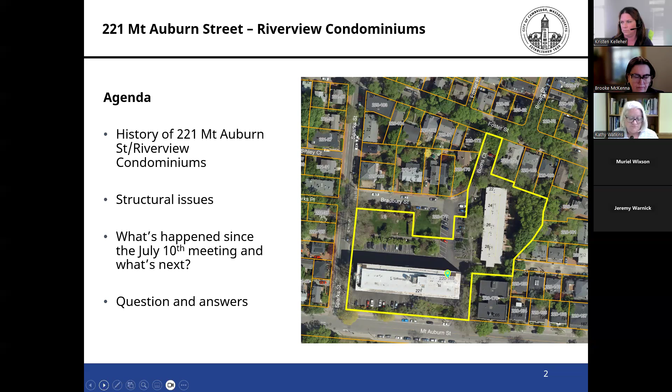And again, I emphasize that some folks have heard this presentation 2 or 3 times, but again, I ask for your patience. And also with us tonight, and presenting with me, is Brooke McKenna, who's our Commissioner of Transportation. And then I would also say we have a lot of staff that have really been engaged with this up to the highest levels, including the city manager and a number of department heads across the city, really helping us work through this situation. So you can go ahead to the next slide. And again, as Kristen mentioned, we're going to do Q&A at the end and just make sure we can have time to get through as many questions as folks can.

This is an executive summary. It's got a lot of words in it. I just want to say that we wanted to pull together a high-level summary that people can read through. This whole presentation will be shared on the website after tonight's meeting.

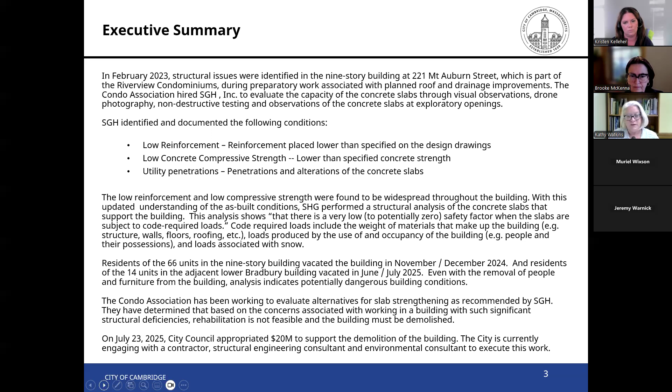So I want to take a little bit of a step back and even just talk about the history of the development that's known as Riverview Condominiums. And so the Cambridge Redevelopment Authority, going back to 1958, acquired all of these parcels and created one big parcel for development. And then that was developed by First Realty Company of Boston.

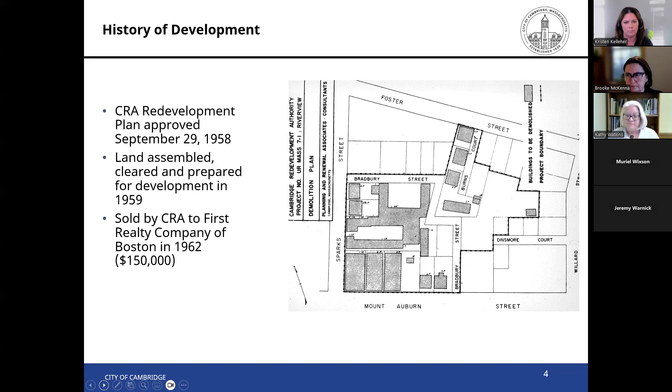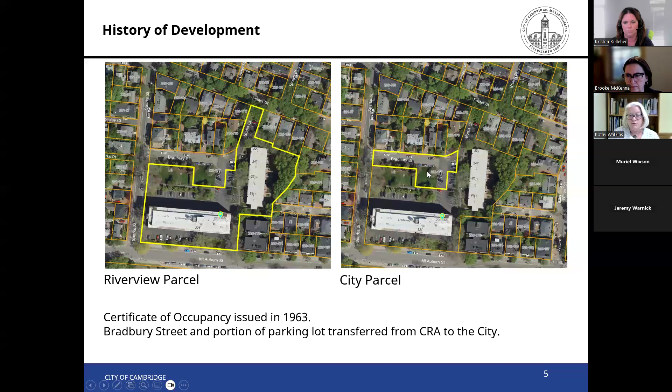Good, next slide. So after the CRA consolidated all of those parcels, they then created the parcel on the left, which is known as the Riverview parcel. And that includes both that front building, the 9-story building that we're really focused on tonight, as well as the lower Bradbury units that folks talk about. On the right is the parcel that became the city's parcel, and that includes Bradbury Street itself, as well as a little bit of open space there. So there are these 2 parcels that people see and think of.

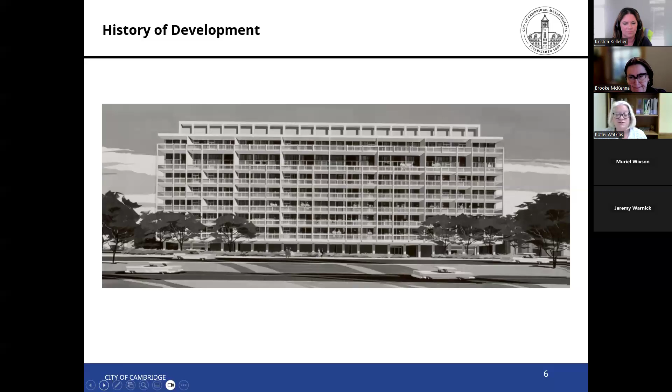This is an image, we sort of call it the Jetsons image. It shows the architect's view of what the building would be before it was developed, and I think it's a pretty accurate reflection of the image.

Next slide. So again, these are the 2 different buildings. So the first one with the yellow star is the 221 Mount Auburn Street. It's the 9-story concrete structure with about 66 units. It is again the focus of tonight's conversation. The blue star indicates the lower rise 3-story Bradbury building that has approximately 14 units. The two buildings share utilities, and they're also part of one condominium association, but the structural issues and concerns are isolated to the 9-story 221 Mount Auburn Street building.

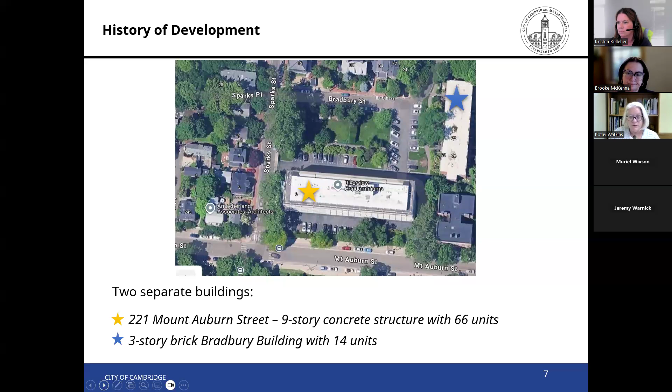The next two slides talk a little bit about what the existing zoning is, and we got a lot of questions during the previous meeting about what can happen on the site once the building is demolished. And while we are a long way from having a development proposal, we did want to share the existing information. So the entire site is zoned residential, and there's two different pieces of that. So again, the piece in the front where the larger building is, is zoned Residence C2. And that zoning allows multifamily housing up to 7 stories, about 85 feet tall. The back part of the parcel is zoned Residence C1, and that allows multifamily housing up to 6 stories above grade if the housing meets inclusionary zoning requirements.

And I think that people hopefully have a pretty good understanding. Inclusionary housing means that some of the units are reserved for low to moderate income households. Any housing developments in the city that are 10,000 square feet or greater are required to include inclusionary zoning housing. And then any development that is greater than 75,000 square feet requires a special permit approved by the planning board that includes full public hearings. And so we just want to say that we don't know exactly what's going to happen or what that will look like, but there would be a public process. I do also want to point out the entire site is approximately 2 acres and has currently a little over 100,000 square feet of residential housing.

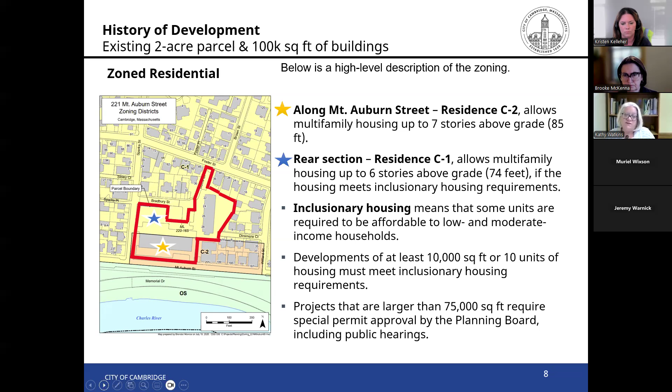Next slide. So again, we talked a little bit about it's fully residential. We talked about the zoning. Just want to be really clear that there are a lot of nuances associated with development that would be worked through in that development process through the planning board. There is no identified timeline for the redevelopment of the site. Really, as you'll hear as we're going through this, the current focus, and certainly the city's primary focus at this time, is really on protecting public health and public safety. And so that is the primary focus of what we're going to talk about tonight, and also the primary efforts over the next 6 months.

Once the city completes the demolition, the property remains under the ownership of the condominium association. So the individual unit owners would still continue to own that property. They have indicated that they think it will take at least a year to go through the legal process before they are in a position to sell or redevelop the property. So just again, want to lay out that there's a lot of questions about redevelopment, and we're providing as much information as we can, but there's a lot that we don't know yet. And one of the things I do also want to point out is that I think that's true of many different areas. We are really trying to be as transparent and share information as much as we can and as quickly as we can. But that also means that there are a lot of different questions that people have that unfortunately we don't have the answers to at this time.

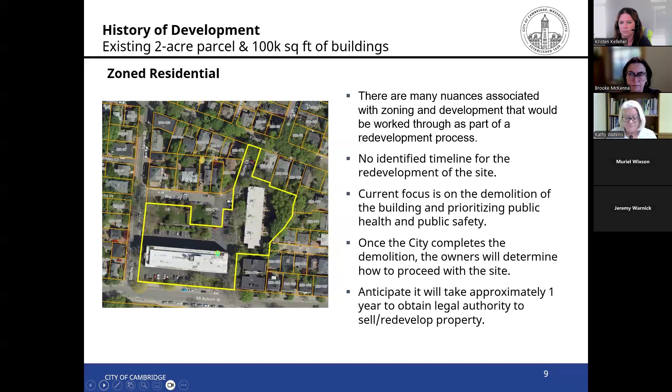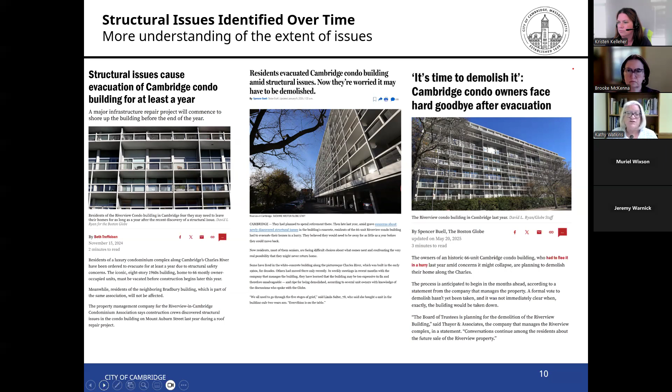So we're really going to focus now on the structural issues in the building. I think it's become clear to us as we've been meeting very frequently with the direct abutters, and at the meeting we had 2 weeks ago, that there's a pretty good understanding in the community about the fact that this building has issues that need to be addressed. And so these are just some highlighted coverage that provide a high level overview of that. I think the next slide shows that even more recently, as the city has become involved, there's been a lot more coverage. Jeremy Warnick, who's helping us here with the logistics tonight, is really our media person, and he said that there's been over 150 news stories about this building, and so there's been an extensive amount of coverage.

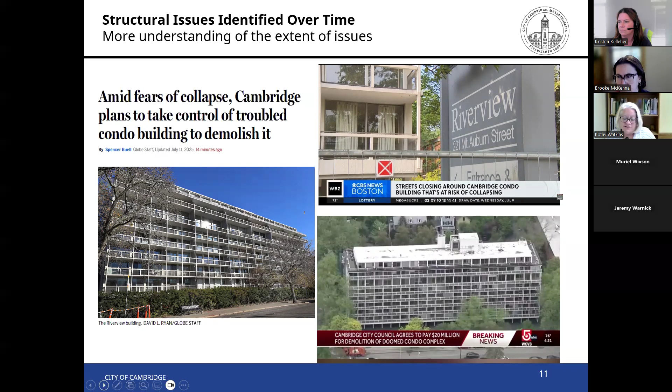And then, as we talked about in the articles, first identified that there's repair issues. Let's figure out how to repair them, determined that that wasn't possible, really focused on how do we demolish the building, and then really came to the city this late May, early June of this year saying they need help. They know the building needs to be demolished. They don't have the resources and the ability to do that demolition themselves. And so really reached out to the city. And that's when we really became involved.

And I would say we've been meeting 2 or 3 times a week with varying groups about this project to really understand what's going on and what's really necessary, what steps are necessary to be protective of public health and safety.

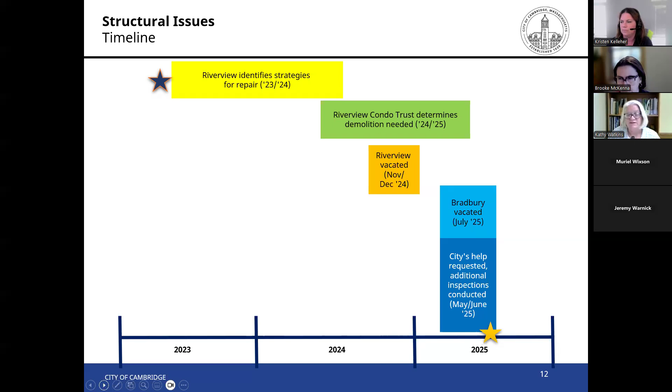So again, we talked a little bit about 2023. The Condo Association was doing preparatory work to look at roof repair as well as drainage improvements. And so when they were doing that work, they were coring through balconies to do new drainage stacks. When they did that, they encountered rebar. So we talk about structural steel in the concrete, and the rebar was not located where they expected it to be, which raised some red flags of what's going on here.

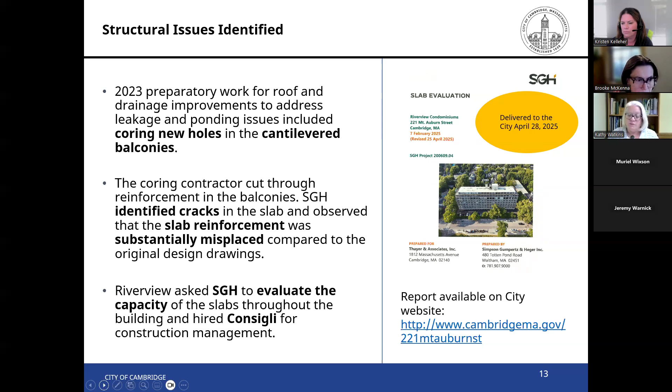And so at that point, they had SGH, who is one of the premier structural engineering firms that really specializes in concrete, come in and do a full analysis to say what's going on in the building and what do we need to do to repair the building. So SGH really went through the entire building, and they did ground penetrating radar to identify the location of where that steel was and compared it to where it should be.

So if you think about, you have a concrete slab that's 8 or 9 inches thick, and that's really providing some of that structural support for the building. The way that concrete slab really gets its full strength is that there's rebar that's also placed within that concrete. That rebar is specified to be at a very specific location. When they did the analysis, they found throughout the building, it was placed about 2 inches deeper than it should have been. So that means it's not providing the structural strength that it was designed to provide.

The other issue they found, and again, pretty consistently throughout the building, is what is the strength of the concrete? So we generally talk about concrete in pounds per square inch. And so the building specified concrete to be 3,000 pounds per square inch. When they tested it throughout the building, it was on average about 2,000 pounds per square inch. So again, consistently less strength than was specified, and again, consistently throughout the building.

There were some other issues, and again, I would say those are much less severe. So there were utility penetrations that have been made over the years and other types of concrete repair. But the most significant issues are really these first two that were construction issues and consistent throughout the building.

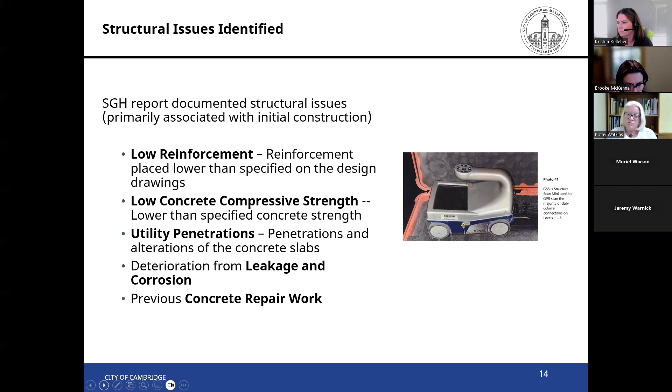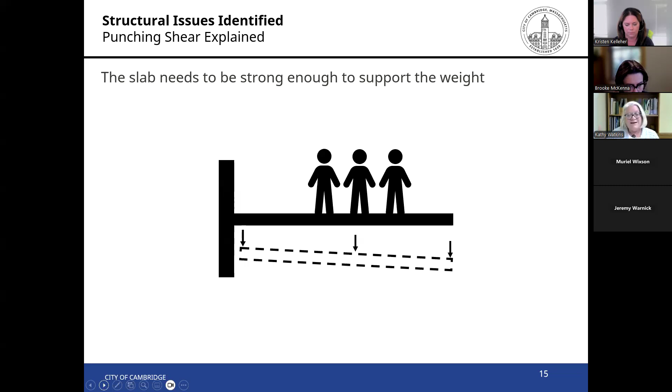And so we want to talk a little bit about what does that mean and what are the concerns that that means for the building. So when we think about the building, and again, that concrete slab, it needs to be designed to support all of the weight of the building. And so the weight that you're looking at when you're designing the building is the weight of the building itself, the weight of the people and their possessions, and then also things like snow load. So if we get a big snowstorm and there's a lot of snow on the roof, that can add a significant amount of weight to the building.

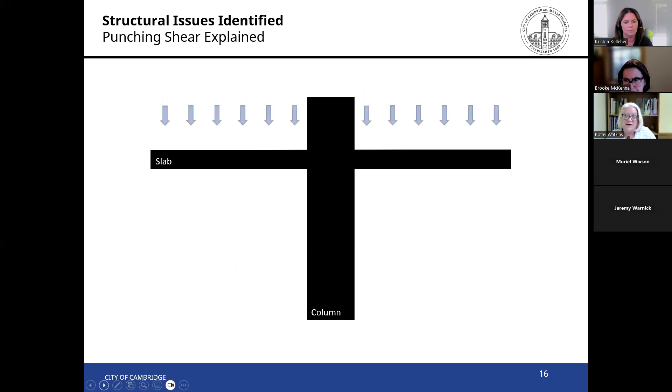So you can go to the next slide. And so again, this is sort of a diagram that shows there are these columns to the building and then these slabs. So we talked a little bit about the slabs that have that concrete strength issue and also that rebar issue. And then there's this connection between the concrete column and the slab. And so that needs to be strong enough to really support all of those different weights that we talked about.

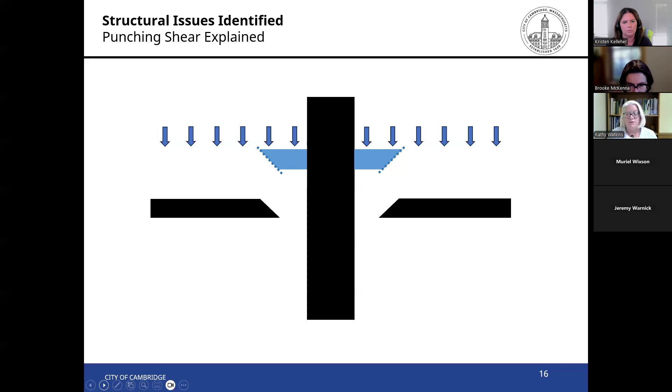And the concern is that if it's not strong enough, you can get what's called a punching shear. And a punching shear failure is a very quick and sort of brittle failure. And so again, if you sort of do the next animation, if you don't have the strength there between the column and the slab, you can get this very dramatic pancake kind of collapse. And so you can lose those columns, and then that can impact the levels below. And so that is the concern that we're really worried about with the building.

And so as SGH really went through and looked at the building, did that analysis, there are almost 800 of those column to slab connections, and they've done an analysis of each of those. Their report showed that there's very low to potentially zero safety factor, again, when the slabs are subject to all those code required loads, like the people, their possessions, and the snow.

And then they also looked at, okay, well, right now it's not winter and the building's been vacated. And so there's less weight on the building. And even with that less weight, there's still a significant number of potentially dangerous slab to column connections.

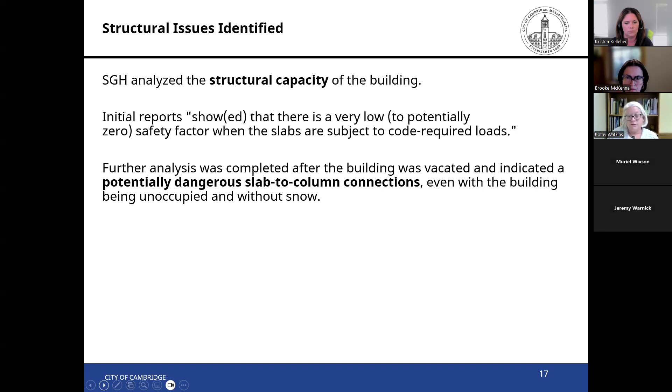So again, this is when the condo association really reached out to the city again, sort of in May, and then we started really meeting in June and really shared the analysis showing the low to zero factor of safety, and again, particularly with that additional snow load, and really identified that the building is over capacity and potentially dangerous. So we've been working with the condo association trying to figure out how does the building get demolished.

When the condo association came to the city, the city manager reached out to the governor's office to make sure that we're getting support and information and really collaborating with various state partners throughout this process.

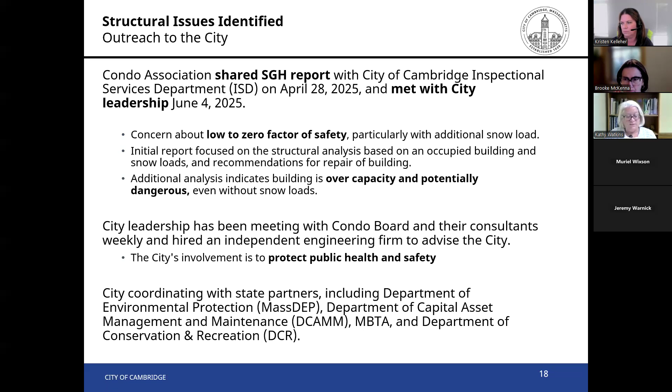And one of the things I don't know that I touched on quite enough, but the condo association has also gone through a process where they identified that there were these issues with the building and then said, well, obviously your first assumption and your first move is to repair the building. And so they really went through a process to say, what would it take to repair the building? And with that came up with, it's about an $80 million repair project.

And once they really got into the details of it, it became clear that given the structural concerns in the building, it's really not possible to do that level of work in that building. And so it came to the very unfortunate conclusion that the building needed to be demolished. And so now we're sort of in this moment where it's become clear that the city really needs to get involved, and needs to really take the lead on this demolition.

And so one of the things we're really focused on is how are we reducing risk? And we're talking about risk sort of in two different buckets, so that we have risk between now and the time demolition begins. And then we also have risk during demolition. And so we're going to talk about those two things a little bit differently. So the first is between now and when demolition can begin, what can we do to reduce risk?

And so people will have seen that the contractor working for the condo association put up additional fencing to really secure the site, to make sure people aren't entering the site that shouldn't be there. They've also been working to disconnect utilities. And the emphasis of that is really, one, we need to disconnect the utilities to begin the demolition. It also helps reduce risk.

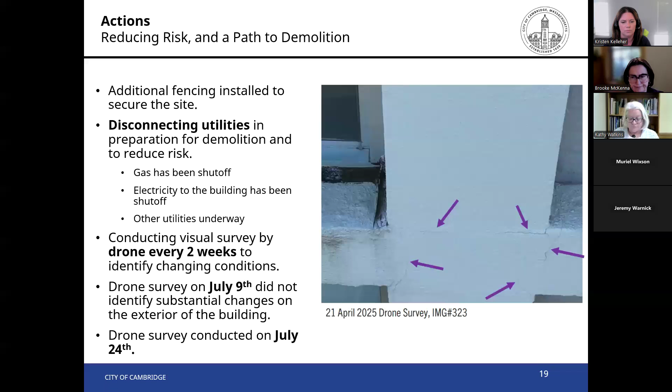The other thing we've been doing, and I would say particularly in the last sort of 3 weeks, has been doing a lot of outreach, making sure that we're sharing the information that we have with the broader community. We had the meeting on July 10th. We had over 80 people in attendance. That was in person. And then we wanted to have a follow-up meeting tonight, again, to make it more accessible so that people that weren't able to attend could come, or people that were not able to attend in person

have the Zoom option. We've also been meeting really closely with the direct abutters who are most impacted by both the current situation as well as during the demolition process. So we've reached out and met with, I think, just about every resident on that first section of Sparks Street, the Bradbury Street residents, and then also the condo building immediately to the Harvard Square side of the Riverview.

The other thing we're doing is really working to get an experienced contractor on board. And so we know that this type of work is extremely complicated in this dense, very close, tight knit residential neighborhood. And so we want to make sure that we have a good contractor that is prepared to do that work. We've also closed access to the adjacent public streets, and that happened on July 19th.

And I think we've had a lot of questions about why are we closing the streets now, but demolition isn't going to begin for another couple months. And based on the information we have, again, we were trying to keep people away from the building. We know that people using the public streets don't necessarily understand what's going on, and it's really important for us to keep people away from the building. So we did make the very difficult decision to close both Mount Auburn Street and Sparks Streets, as well as DCR closed the one closest lane of Memorial Drive.

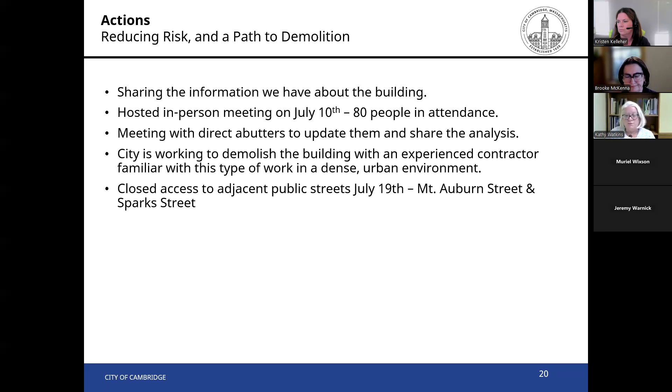So I'm going to turn it over to Brooke, and she can really talk through the work that's been done to get those detours in place. And as I do that, I just want to give an incredible shout out to Brooke and her whole team in terms of all the work that's really gone into this. And while it's been extremely challenging and I know frustrating and difficult for people, it has gone extremely smoothly given the substantial detours that are in place. So I will turn it over to Brooke.

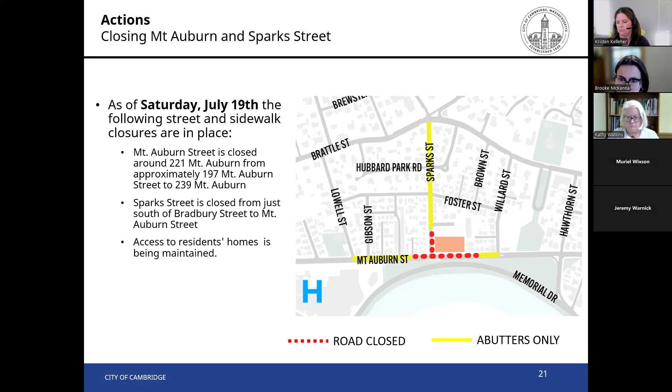So we have done as much as possible in terms of communication to get the word out about these closures and these detours. So we did reach out to the residential abutters. We worked closely with the hospital and other key city partners. We were lucky enough to get a good amount of media coverage from local, regional, and national outlets to really get the word out to an even wider audience.

We utilized the city's Code Red alert system, as well as email and app emergency alerts from Nextdoor and the Cambridge Police Tip 411 notification system. We had stories on the city's website. We did email mailings and a social media campaign. So you can see photos of some of the samples of the alerts that did go out.

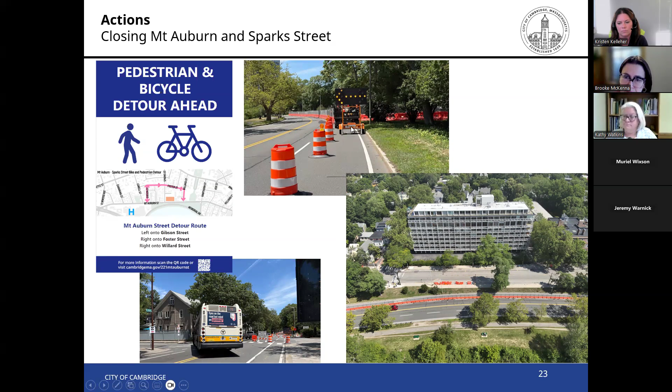And in the lower left, you can see with the detours in place, the MBTA bus navigating that detour route. We've added additional signage to make sure that the pedestrian bicycle detour is really clear for folks. That's one of the more challenging aspects of it. With most construction sites you come across, the street might be closed to vehicles, but you can always get through on foot or by bike. But in this case, because it is a safety issue, we do have to detour the pedestrians and bicycles as well. Now we can go to the next slide.

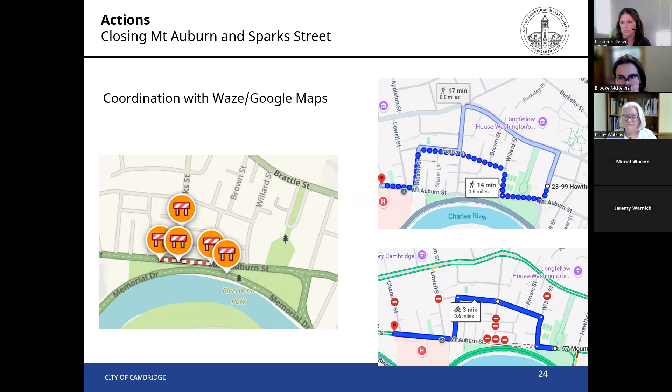Whereas a couple of weeks ago, if you were traveling from point A to point B, the navigation apps might send you straight down Mount Auburn Street. Now they know that's not possible. And that results in people generally being kept further away from the detour area. That's a really important part of our strategy. We want people who are coming to the local area to come and use the detours, but folks who don't have a local destination, it's better to stay away from the general area. And next slide.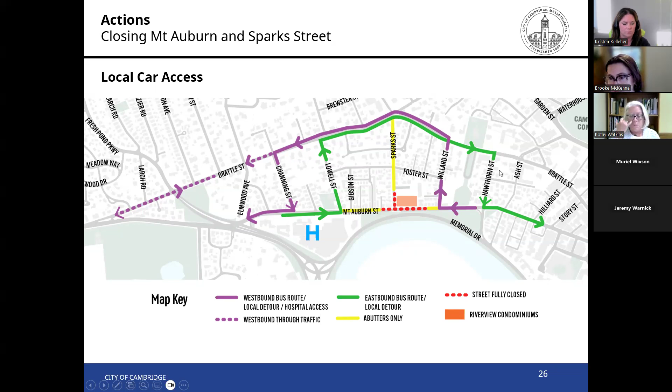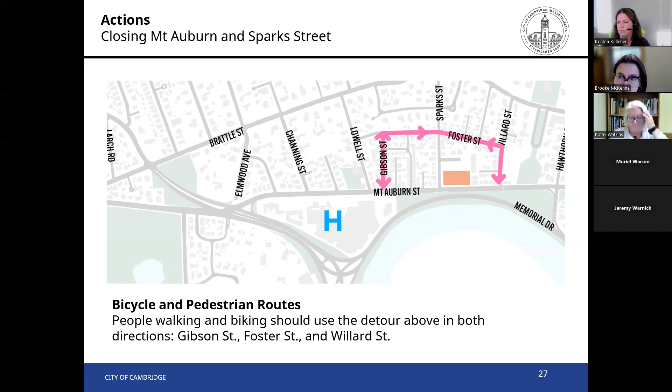In the Harvard Square direction, you would follow the green line, which would take you up Lowell Street to Brattle Street, and then back down Hawthorne Street. And then you can continue along Mount Auburn into Harvard Square. We can go to the next slide. This is the bicycle and pedestrian detour. It is the shortest detour, and folks can go up Gibson Street to Foster Street and then down Willard. That is the same in both directions, whether you're coming from Harvard Square or coming from Watertown.

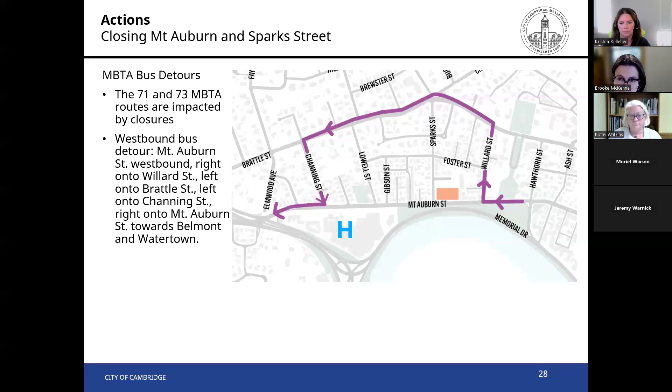As I mentioned, there are two significant bus routes, and they are following the same detour route as the local traffic. Coming out of Harvard Square, they'll go up Willard, down Brattle Street to Channing Street, and then along Mount Auburn. And in the opposite direction, we can go to the next slide, reverse that and go up Lowell Street to Brattle Street, down Hawthorne, and back to Mount Auburn and into Harvard Square.

In order to make these detours work as seamlessly as we can, we did make three streets into temporary one-way streets. Channing Street is now operating one way towards Mount Auburn Street. Lowell Street is operating one way away from Mount Auburn Street towards Brattle. And Willard is also operating one way northbound towards Brattle Street. What you don't see on the map is Hawthorne Street, which was already a one way that operates southbound towards Mount Auburn Street. So we now have two one-way pairs for either end of the detour.

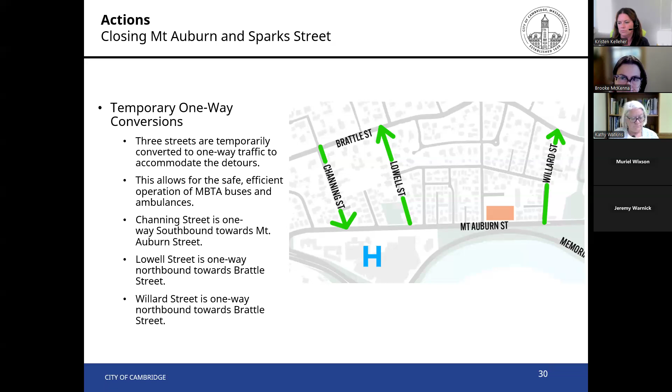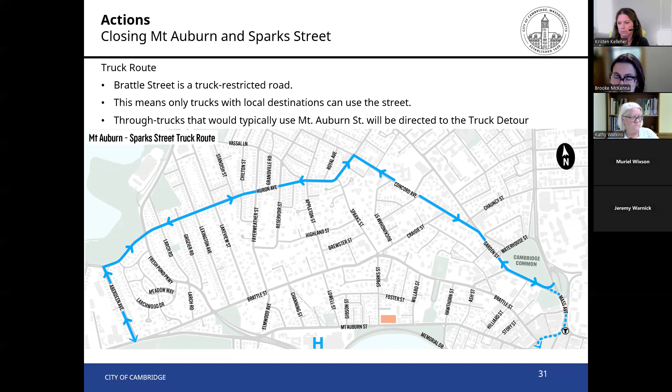Again, as I mentioned, Brattle Street is a truck restricted route. So we do have an alternative truck detour for through trucks that starts all the way out at Aberdeen Ave, travels up towards Huron Ave to Concord Ave to Garden Street and back to Mass Ave. And that detour is the same whether you're heading towards Harvard Square or away from Harvard Square. So the only trucks that will use Brattle Street in the local detours are those with local destinations.

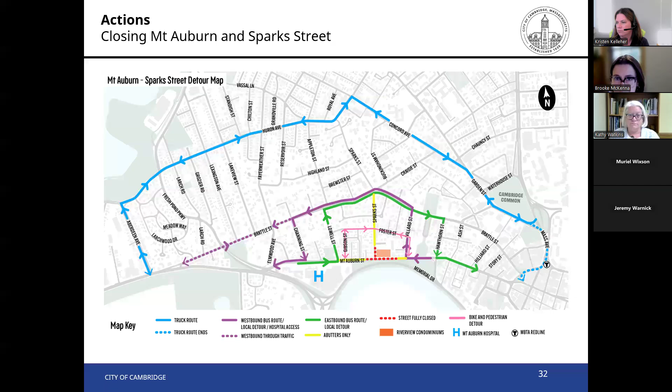All right. So this one, we've had the closures in for almost a week now, and we are happy with the way that it's been going so far. We have been hearing from folks with concerns and questions and comments, and we really appreciate that people have been reaching out to us. We have made some adjustments. We were able to add some time to Hawthorne Street at the Hawthorne and Mount Auburn signal. We're continuing to add signage where needed, and we'll continue to monitor and make more adjustments as we go along.

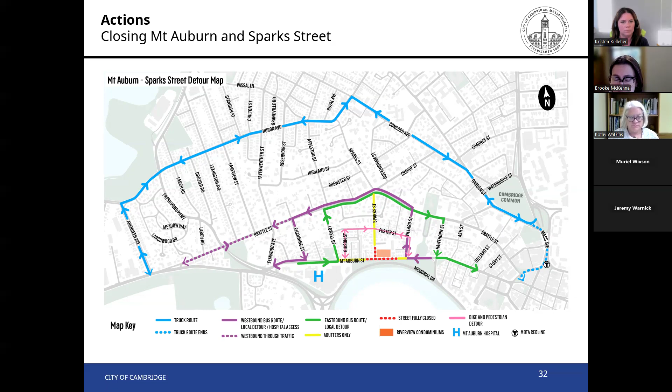We made a few parking changes, a few parking restrictions to make sure that the buses and larger vehicles could make turns. And then we also converted some 2-hour parking along Mount Auburn Street to resident parking only to make up for some of what was lost with the closure. And as I said, we are continuing to monitor that, and we'll continue to make tweaks as we go along.

Folks who live locally might recall that there has been some construction work happening prior to the closure along Mount Auburn Street near the hospital, and that is MBTA work on duct banks in the sidewalk. So that's Newport Construction working on behalf of the T. And we did stop that work this week while we got the detours in place and gave them a little time to settle in. But they will resume that work next week.

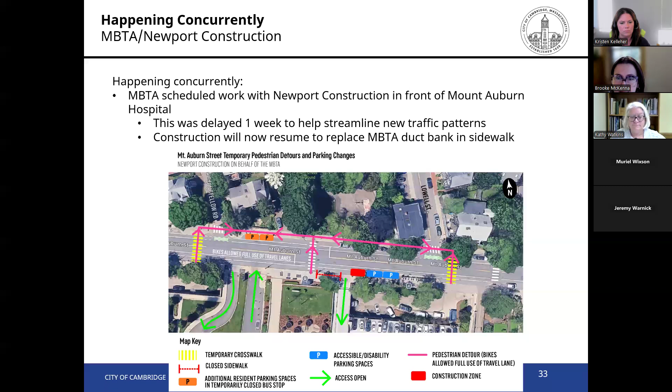But we're going to continue to coordinate really closely with Newport on this construction work, and also working very closely with the hospital to make sure that access is retained at all times. So we're going to be monitoring that closely. And with that, I think I will hand things back to Kathy.

Thank you. I was muted. Yeah, so thanks for all the information about the traffic. I want to turn a little bit to, and maybe we glossed over it a little too quickly, how we've gone from the condo to now the city is involved. As we've worked with the condominium association and their full team of folks, it's again become clear that, you can imagine, having an 80-unit condo building, it's not easy to figure out financing and the logistics of demolishing what is everyone's homes. And so that has been a super challenging situation for those homeowners.

And so, again, when they reached out to us, they know the building at this point needs to be demolished. Repairs aren't an option. And how do they help navigate that? And so they reached out to the city. We've done a lot of work back and forth with their consultants, really evaluating the various reports and making sure that we've confirmed that they've gone through all the process that they can in terms of getting to demolition.

And so then there's a process where, in order for the city to be involved and really undertake a demolition on private property, which is not something we take lightly, both in terms of going onto private property and doing work, and also spending city funds, which I'll talk a little bit more about later, there's a process that we follow. And so at the end of June, the Inspectional Services Department formally notified the owners that the building must be removed and gave them a deadline for when the building had to be removed, and they indicated clearly to us that they were not capable of doing so.

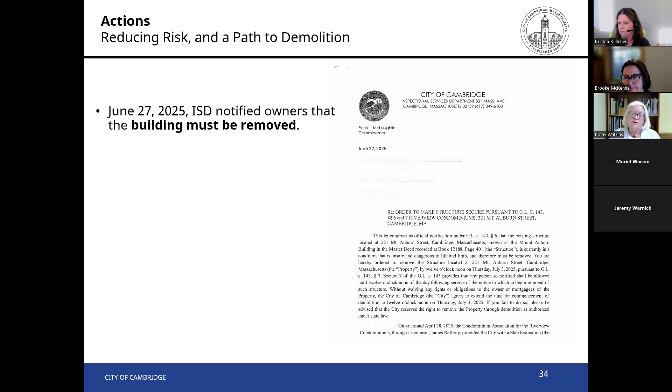But that sort of starts this process that allows the city to be involved. And then the next step in that process is that the city convened what's known as a board of survey to assess the property. And the board of survey consists of three folks, and it's the fire chief, the building commissioner, the city engineer, and then also an independent structural engineer. So in this case, the city brought in STV, and STV reviewed all of SGH's work to confirm that they concurred with their analysis.

And then the board of survey issued a report, and that was just issued earlier this week, confirming that the building has to be demolished. And again, with the focus on protecting the health and safety of the public. And so with that board of survey report, that is under state law what authorizes the city to enter onto the property to do the demolition of the building, again with the focus on protecting public safety.

Earlier this week, yesterday, we had a meeting with the city council to authorize the funds needed to do this work. So yesterday, city council authorized $20 million to support the demolition. And I would say it's very clear that city council, one, understands the significant impact on the community and the neighbors in terms of this building and the concerns about its structural safety. It knows that we have a role to play here, and also is committed to making sure that the city recovers those funds.

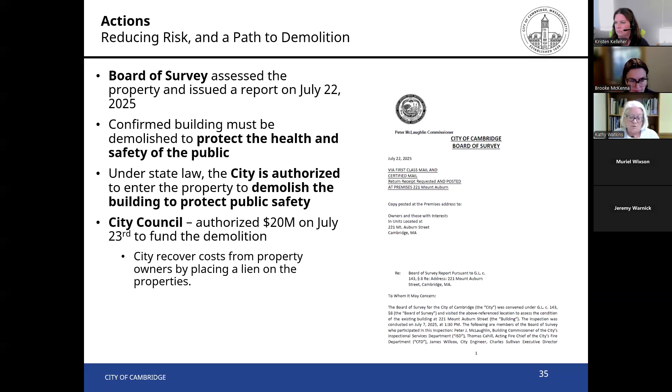I think the demolition and how that's going to happen is probably one of the areas where we received the most comments and concerns. And I'd say this is also the area where there's a lot of unknowns. How the building is going to be demolished, exactly what are the protections that are going to be in place to protect particularly the immediate abutters, but the broader community as well during that construction. Those are where I think there's a lot of questions.

What I can say is that we're currently engaging to bring on a qualified contractor with experience in this kind of work. We're also engaging with both a structural engineering consultant and an environmental consultant that'll be working directly for the city to both advise us and help us manage the contractor in terms of how we do this work as safely as we can. And the environmental consultant is a really important piece of this.

So one of the things we haven't really touched on is that the building, like pretty much every building of its era, has asbestos in it. Asbestos is only really a concern when it's friable. The asbestos in the building is in some popcorn ceilings, tiles, and a couple other areas in the building. And so when you do a typical demolition project, you would have contractors go in and do abatement and remove all that material in advance.

Given the condition of the building, that's not possible. We can't have contractors in the building doing that kind of demolition and removal at all of these locations throughout the building. And that would also add a significant amount of time into the process and be an unsafe work environment. And so what that means is that the building would be demolished in what's known as a non-traditional demolition. That's a very specific term that means it would be permitted through DEP, to ensure that the contractor is putting measures in place to make sure they're removing the building as safely as it can be.

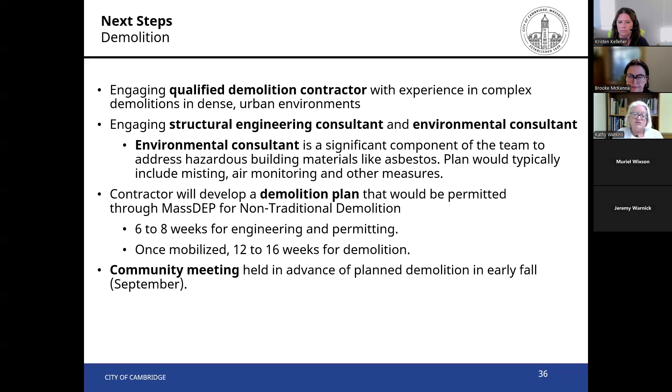Next step. The other thing I'd say is that, between now and September, we're going to continue to be monitoring the detours, making adjustments as necessary. Brooke already talked about some of the things we've been doing in terms of looking at parking changes, signal changes, additional signage. Brooke talked a lot about how we've been meeting really closely several times with the hospital to make sure that their access is maintained, which is critical. And so we'll continue monitoring those detours, making adjustments.

And then, and Kristen will talk about this, some of the communication and outreach to particularly those direct abutters, making sure we're in close contact with them and sharing information. And we talked a little bit about the demolition. Some folks have raised concerns about who's managing the demolition, how will that be done? I just want to be really clear that the city staff and our contractors will be managing the demolition.

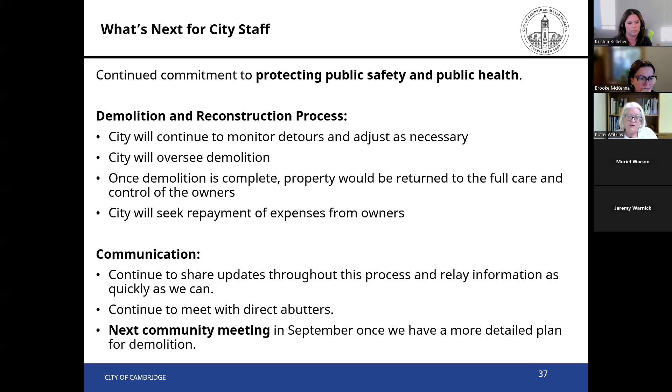And then again, once the demolition is complete, the property goes back to the care and control of the owners. And concurrently we would be seeking repayment from the owners of whatever funds we spend on the demolition. And Kristen, do you want to talk a little bit, even on the next slide or either one, about communication efforts, what people can expect from us?

Sure. I know many of you have already done so, but if anyone has not yet gone to the project page, we highly encourage it. As Kathy mentioned, we're consistently posting data and documents as we get them. When you go to the project page, there'll be an area on the contacts tab where you can sign up for email notifications. And just immediately prior to this meeting, I uploaded the Board of Survey and the latest drone report from today.

So you can go to the Documents tab and find those and a number of other reports we had previously put up. There's currently a document up there called FAQs, which has frequently asked questions that we've been receiving through a number of avenues, and we plan to update that regularly. So keep checking; that's on both the latest tab and the Documents tab. So far, a lot of people that have reached out have said that's been very useful, and it answers a lot of the questions you might have. So I would take a look at that.

If that doesn't answer your question, feel free to reach out at any time. My email address and my phone number are on the screen there. The next community meeting similar to this one will be in September. I think at that meeting, we'll have a lot of the answers to your questions regarding the detailed schedule for demolition, the plans, and the approach of how it will actually be done. We don't have that date yet, but as soon as we do, sign up for the email notifications and we'll let you know, but that will be in September sometime.